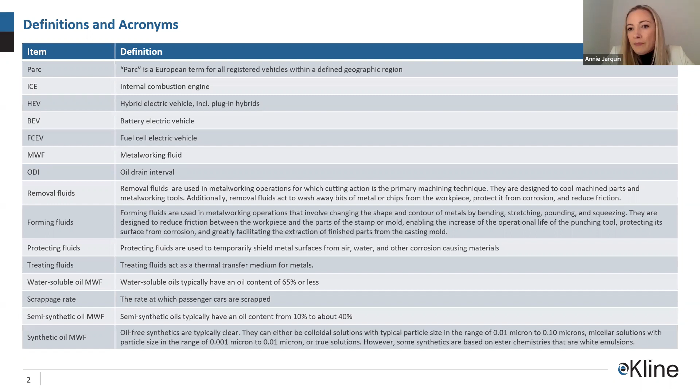If we look at the specific agenda, Jason's going to talk us through the various vehicle technologies, and why some have won and some have been less successful, as well as some of the strategies of the OEMs and how that's looking out to the future. Then Gabriel will walk us through the metalworking fluid results and some of the assumptions about where we see the change in fluid demand. We'll flick back to Jason then, and he's going to talk us through the PCMO demand outlook, the EV sales outlook. And then we'll look at the opportunities that come out of electric vehicles, of which there are quite a few.

Then we'll touch upon the Canadian market and look at some of the implications there, and then a couple of key takeaways. We should hit these in probably under an hour, which will leave us plenty of time for questions.

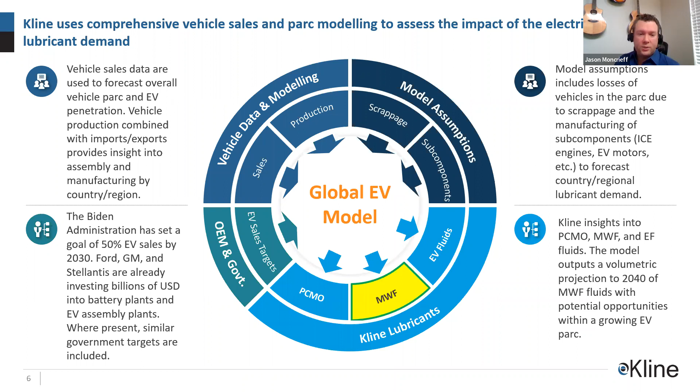And at the very end of this, we take these models with cars and the parc, and then we churn it through our knowledge of PCMO, metalworking fluids, and also EV fluids to arrive at a quantitative output. And with that, we're going to go right into some of the implications with metalworking fluids. So I'm going to turn it over to Gabriel. Okay, thank you, Jason.

Moving to the metalworking fluids part. Next slide, please. So here, firstly, we started looking at the total metalworking fluid demand by end use in North America. We took this number from our market research division, which surveys the market every 2-3 years for metalworking. We found out that 40% of the total metalworking fluid demand lies with the transportation sector, of which 28% goes to consumer automotive, 8% to aerospace, and 4% to other, which includes commercial automotive. So that's about 51 million gallons for consumer automotive, which is the main target of this study.

Now, Fiat Chrysler, Ford, and GM have nearly 200 assembly plants in the US, as well as other manufacturing and distribution facilities. Moving to the next slide. Here we're trying to look at how metalworking fluids feed into the manufacturing of parts for various vehicles. First, the body of the vehicles: there is not much change between a hybrid, a BEV, or an ICE. It's pretty much the same body structure, so there is no change in the metalworking fluids used for the body.

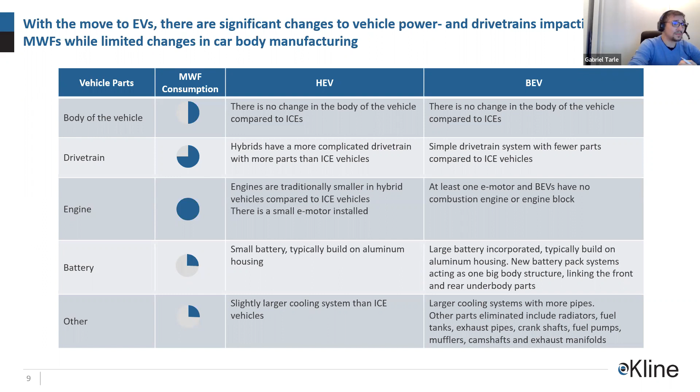On the next slide, reverting to the slides from before, 51 million gallons was the magic number for metalworking fluid consumption in consumer automotive. If we split them into product categories, you have 60% for removal fluids, about 30% for forming fluids, and 5% each for protecting and treating fluids. Now, I know in North America, people refer to removal fluids as coolants. At Kline, we call them removal fluids, and we call coolants the antifreeze used for vehicles.

In terms of product category, for hybrids, there is a slight reduction in removal fluids, and this comes due to the fact that engines tend to be smaller than your typical ICE. But there is a slightly higher consumption in drivetrain manufacturing because hybrids have a more complicated drivetrain with more parts compared to ICE.

On the removal fluids front for BEVs, there is a significant reduction because there is no thermal combustion engine, and there is low consumption in drivetrain manufacturing because BEVs have fewer parts and the drivetrain itself is small. Removal fluids are not used in car body manufacturing in any vehicle type.

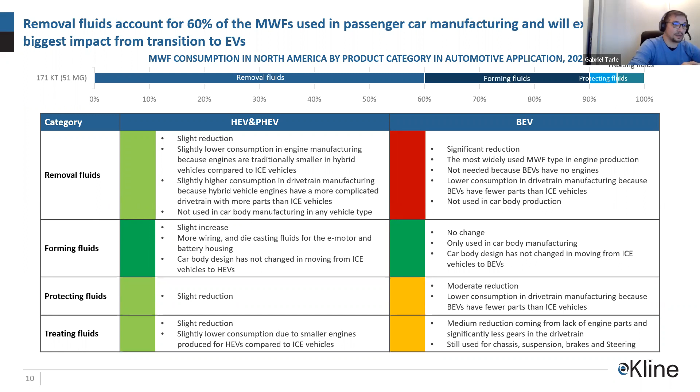Next slide, please, Jason. So bearing in mind that we assess that removal fluids have the highest impact on the electrification of the cars, we try to look at it in the most simple way to assess a hypothetical 100%. If you were to allocate 100% volume for an ICE, how much would it be reduced for your hybrid or your typical BEV? And we came up with some numbers.

There is an 8% reduction for a hybrid in removal fluid terms, and a 50% reduction in a BEV, which is half of the volume essentially lost in terms of removal fluids. And this further feeds into the total consumption of metalworking fluids and results in a 3% overall reduction in metalworking fluids for your typical hybrid and 33% in your BEV, battery electric vehicle.

The change in consumption pattern by vehicle type is a contraction in overall metalworking fluids demand. And removal fluids are the most widely used metalworking fluids in engine manufacturing. That's well known. And the drivetrain consumption declines because BEVs have fewer parts and the drivetrain is smaller. And there is a slight increase in metal forming in hybrid systems due to the additional wiring and more die casting, because you look at the e-motor and battery housing.

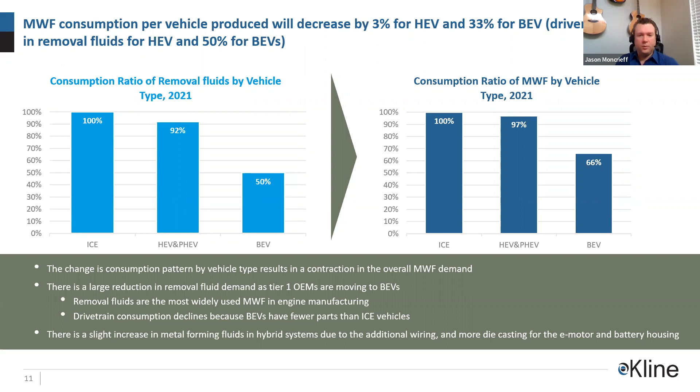Yep. Thanks, Gabriel. Yeah, we wanted to give you some of the output in terms of metalworking fluids and some of the highlights before we start to bore you with kind of the car park and sales models, which is what we're actually going to get into now.

So in the report, we have 3 scenarios that we modeled. We have a likely scenario, and we also have a conservative and an aggressive scenario. We're not going to discuss the conservative scenario today. That is in the report. We're going to look at the likely scenario and the aggressive scenarios today.

The likely scenario was sort of, when I opened up, we said that the government and also OEMs are sort of targeting 50% of their sales to be EV by 2030. Our likely scenario pushes that back a few years to 2035, just because we're looking at all the OEMs. So even if Toyota doesn't really want to get on board, if they want to stay more hybrid, if that's where they think the trend is going, they may not be producing as many battery electric vehicles.

So we push that back a little bit, and also due to some of the speed bumps that we might be feeling along the way in terms of inflation, in terms of the geopolitical issues, also supply chain issues that are still rebounding from the pandemic. And so we just push that back, and that's what we feel like our likely scenario is.

And then we'll also talk about the aggressive scenario, which is basically ignoring everything I just said, just saying that everything is going to be a rosy picture. Supply chains aren't going to have an impact. The geopolitical tensions aren't going to be a factor, even though Russia, they do export quite a lot of nickel, and obviously that's a very important component in terms of making batteries.

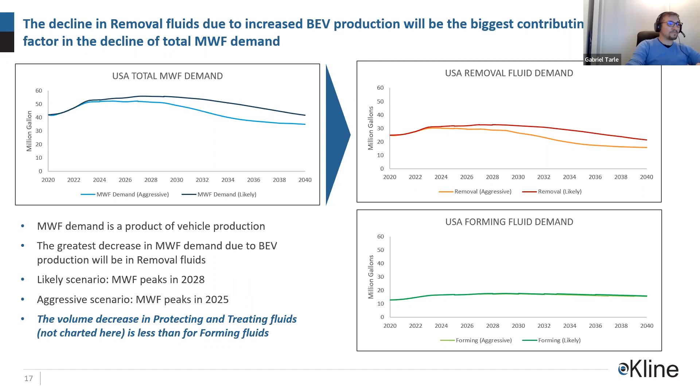Combined with the chip shortage, that obviously drove up prices quite considerably. And now we have inflation on top of that. And so the impact of these two things is probably going to negatively affect vehicle sales in the future. Now this is probably going to happen all across the board. Obviously for ICE and also BEV sales, we expect some sort of decline as the price of a Tesla has gone from $35,000 to close to $50,000 in the last couple of years.

And on the flip side, we do expect in the future things like battery innovations and technology to lower the cost, right? And even if we go back to the first transition of vehicles, back to when the Model T came out, right? That vehicle decreased by 50% in about 10 years. And while we're not expecting some sort of dramatic decrease like that, we are still expecting a decrease in the manufacturing and the materials of some of these components. And we think that will be a boon, and will actually drive sales higher. Also, of course, OEM investment, better thermal management, all these things are probably going to have a positive impact on BEV demand.

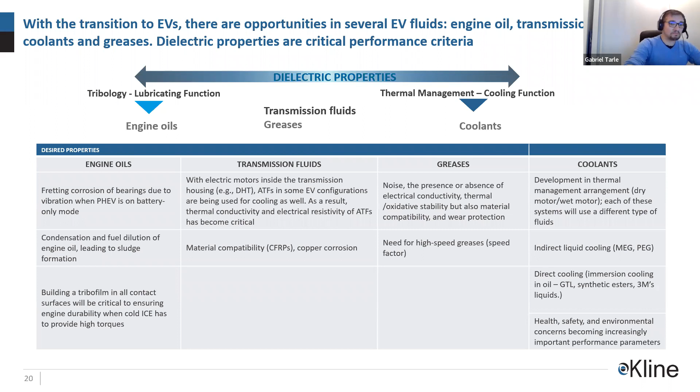In BEVs, on the other hand, most of the fluids are factory fill. There is very little service fill for BEVs. Most of the transmission oils and coolants and greases that go inside are claimed by the OEMs to be fill for life, which is something like 7 or 8 years. And there is little opportunity for service fill in the BEV categories, but for hybrids, there are plenty of opportunities and massive growth.

For BEVs, also on the coolant side, there could be an innovation over the next few years that could perhaps diminish dramatically the amount of fluid needed. If you go away from the water glycol solution, then we wouldn't need such large volumes of coolants or antifreeze, as you may call it. Next one.

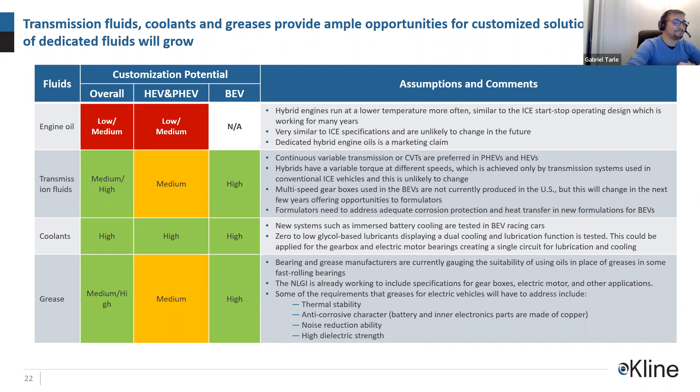So in the report, we've given Canada a similar treatment to what we just went over with the US, and there's a lot more information. So I'm just going to hit some of the highlights in the Canadian market today. In the report, we have two scenarios: an aggressive scenario and a conservative scenario. I will say that the aggressive scenario is what the Canadian government is targeting, which is basically about 99% to 100% of EVs around 2035. I think they want to be completely EV by 2035. So the aggressive scenario is in line with that. The conservative scenario is pushing that back by 5 years or so. But we're looking at a model similar to the US, but pushed up by a few years. So it's actually quite aggressive.

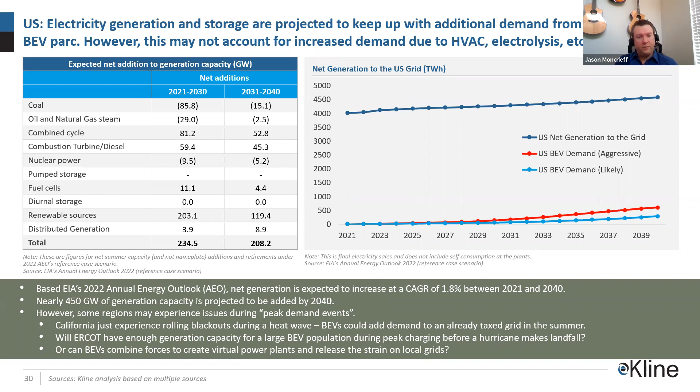However, when we go back to renewables and the increased demand for renewable energy, because thermal power is being phased out in lieu of solar farms and wind farms, this will actually create quite a lot more power generation farms, whether they're solar or wind. And these are going to be dotted around the states and other countries, and these all have to be tied into the grid. So there's actually going to be a lot more transmission lines that have to go along with this.

So that's one of the interesting things that comes out of this. We don't have a number associated with this, but transformer oils might be an opportunity here as well, because the extra power generation plants that are needed because they're renewable are going to have to be connected to the grid, and they're not all going to be concentrated in one area. They're all going to be connected separately. So it's hard to answer that question with a steadfast yes or no, but it is something to look at over time and see how the grid is transforming as the transition evolves.

Okay, thank you very much. We've gotten a number of questions in here. Here's a good one. Why would OEMs not want to build BEV, HEV, ICE, only going in one direction? Shouldn't they want a diverse portfolio? What data confirms this? I think Gabriel might want to jump in at this point, because I know he's actually spoken with OEMs and they do not want to manufacture all three.